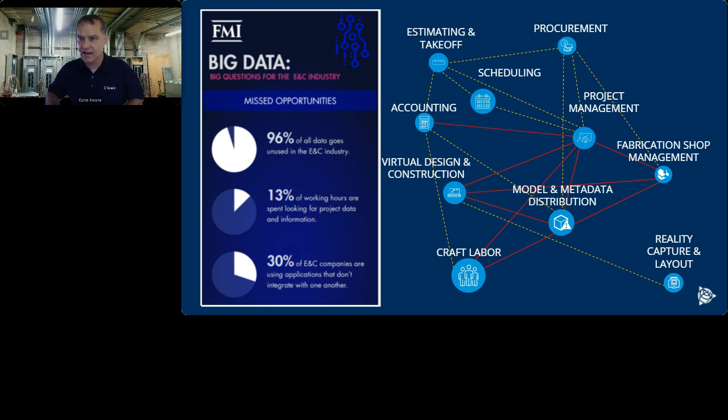So that's kind of the role that guides us here at Trimble. The way we look at this wheel of different apps, we feel we're uniquely positioned to do this well because we already have the industry-leading fabrication and estimating solutions out there. We're widely known for Accubid Estimating, Change Order Pro, Viewpoint ERP and Accounting, Supplier Exchange for Procurement, and SysQue for Modeling and Fabrication, robotic total stations, 3D laser scanners, and the XR10 HoloLens. It really circles all the way around the wheel in terms of the point solutions that we provide.

But hopefully where we shine is the ability to connect those dots and use Trimble Connect as a hub to all of these different workflows.

So Connect is an app that does a lot of things. At its highest level, it's a model viewer, regardless of whatever app, CAD or Revit, that the model was authored in—you can view it in Trimble Connect. Aside from that, it's a great file distribution platform, a little bit like Dropbox, except of course the model viewing capabilities make it a lot better.

Besides that, it becomes an issue tracker that your team can communicate with to get their jobs done. To pick a simple example, questions you might ask yourself, like: are we approved for a change order to do that work on the 4th floor? If so, it's going to change the quantities of material I need delivered on Monday. What's the date of the switchgear delivery that's holding us up? If we don't have it by a certain date, the consequence is going to be this.

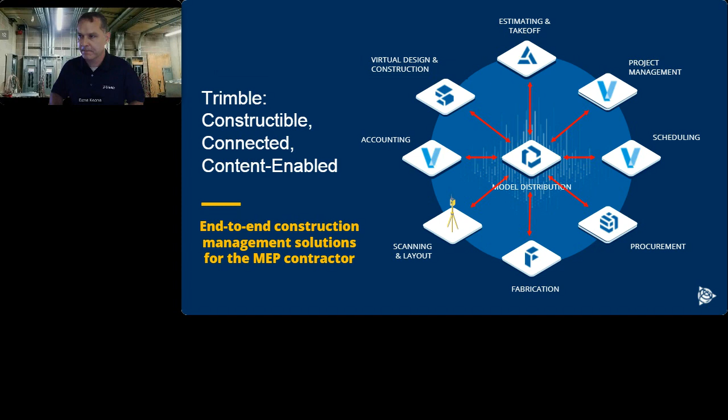These are things you can use Trimble Connect to interact with between the foreman at your shop and field, and the manager and the procurement folks—anybody on the team involved at all. You can answer those questions in a data-logged format and distribute that information around, logging what the answer is, when it was resolved, and even the construction progress, which we'll get into a little bit later. So keep that in mind as we go through this.

We'll talk about that a little bit more later, but another study that deserves a mention here is this one by McKinsey & Company. It's required reading for us here at Trimble, and it guides a lot of our development because it outlines a lot of things undergoing change in the industry right now. It's a very complex study, but I'd summarize it like this.

Construction is finally getting to the point where technology is able to affect the bottom line and the workflows in it. We know it's changed our lives tremendously when you look at technologies you use every day, like Netflix, cell phone apps, Amazon, and things like that. But has it really changed the profitability of electrical contractors? Not so much, but it's definitely having that effect now and going forward over the next 10 years. That's what the study outlines.

It talks about 9 shifts in the industry that are going to affect the way construction is performed. We're going to check out 2 of them specifically today: productization of your work scope—reducing it into small, bite-sized, assembly-line type manufacturing processes—and digitization of your processes, where you can track things all the way through from beginning to end and report on them.

Another big thing this study outlines is that the transformation will involve a reallocation of who gets paid to do what in the industry. So $1 trillion is going to be reallocated to the contractors who actually do the work, a lot of it at the expense of CMs and engineers. This reallocation of money is going to go to certain ones who can add more value to the project, specifically by doing a lot of this productization, by being able to prefab offsite, control their inventory, and operate fast enough to keep up with this.

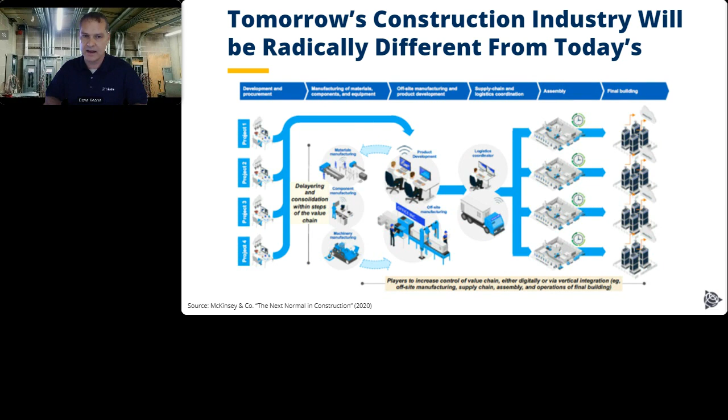What the new normal is going to look like is to install durable processes that will make every project feed into this service, where your processes will dominate and repeatability will happen, and every process from estimating to procurement, fabrication, and all logistics of prefab delivery and installation gets to be repeatable, so jobs get executed a lot more economically with a lot higher quality. That is what's at stake for those who want to reach for that $265 billion in revenue. It'll look a lot like this.

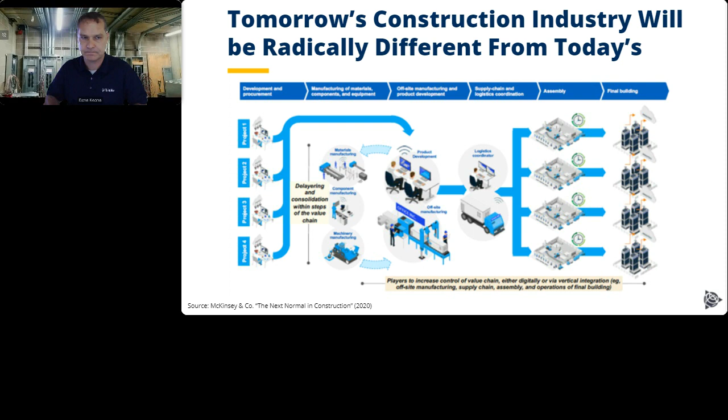So at this point, let's take a poll and ask, what are the top priorities for sustaining and growing your business among these choices? What do you view as the top things that you must do as an electrical contractor to stabilize yourself and position yourself for the future? We'll take a couple minutes here and give you a chance to answer this poll question, and then we'll take a look at the results.

All right, let's take a look. So 75% increased prefabrication and 25% model-based estimating. Okay, good, so that's very good. That'll be very closely in line to what we can talk about today.

So this is the agenda for today. We'll talk about 5 things here under the umbrella of productizing and digitizing. First, we'll begin with very specific and granular ways that you can productize construction, which is essentially prefabrication and the logistics behind it, and then digitizing your workflow, being able to translate information from a model to an estimate, from a model to procurement, and from field progress to management. So let us begin.

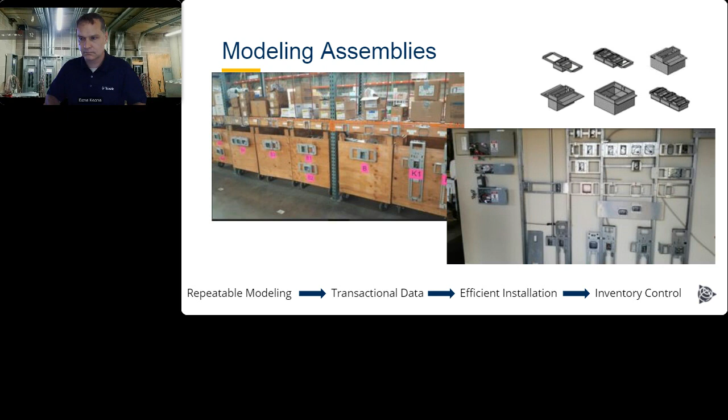All right, can you walk us through that, Judy, what that looks like here in the live view?

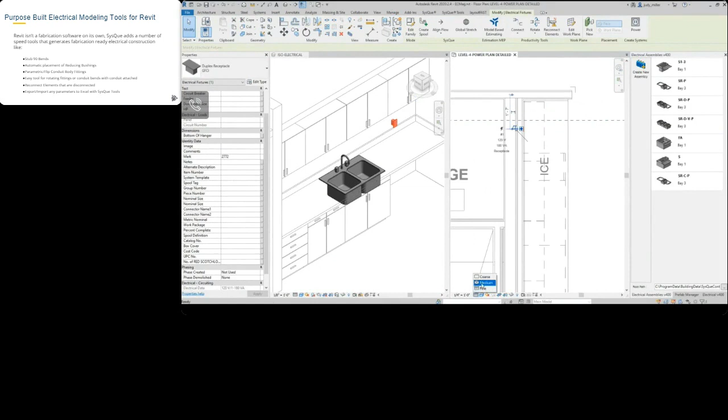Sure. Judy, we can't hear you. I'm trying to see the video, and I'm not seeing the video. Okay, there we go. All right, sorry.

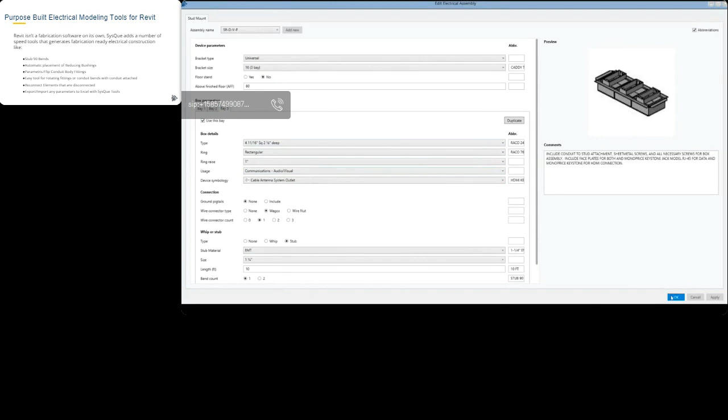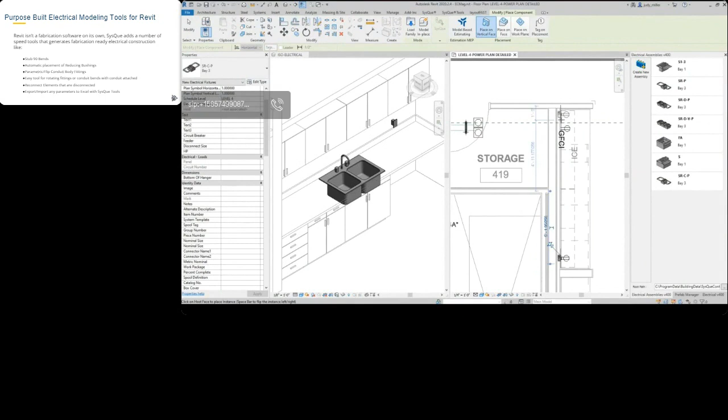So what we showed you at the beginning there was what Revit has out of the box, which is very basic, right? And now we're putting together electrical assemblies within SysQue. So you're picking not only the stud plate or the plate that you're using, the box that you're using, what devices are going to go into each box, the symbology for those as well, in a 2D plan versus a 3D plan. And the elevation also, so when you place these assemblies, you're going to put those directly into the model at the correct elevation as well.

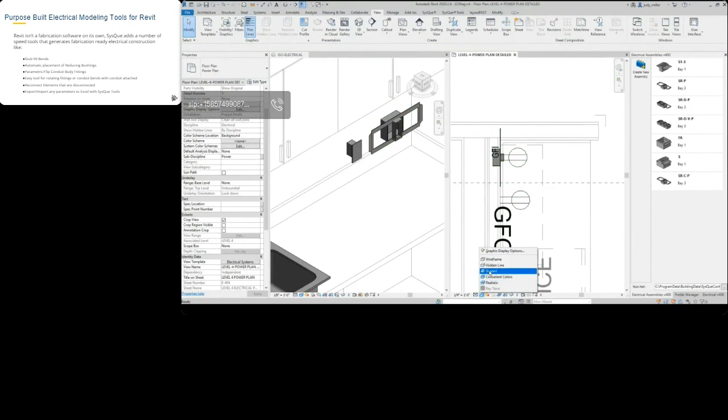So again, you see it there in the 3D view. It looks a lot different than what's in the Revit view, right? Your box is not sitting on the face of the wall, it's in the wall like it should be. You can move the symbology around as necessary as well.

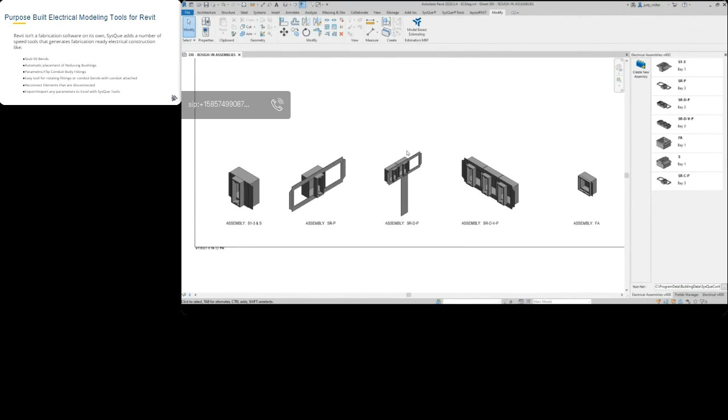When you change from a coarse view to a medium view, you still see that same graphics, where in Revit, when you change to a medium view, you get the 2D symbology in the 2D plan, but your conduit goes to a single line.

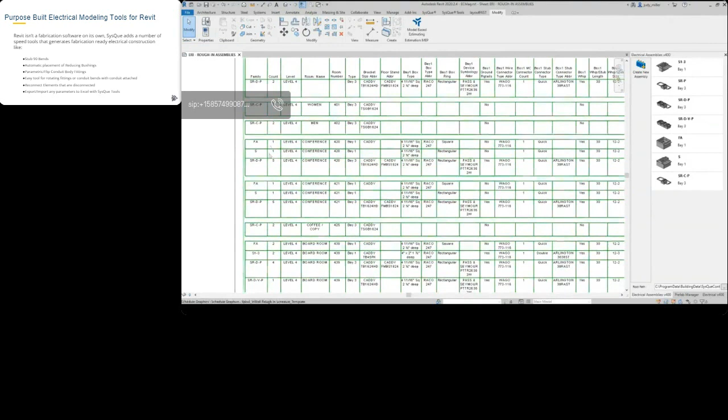So again, this is just an image of what your assemblies will look like as far as details go. And then you have a schedule. You have a Revit schedule that you can sort by room number, you can sort by device type, and it's going to give your prefab department all the information of the pieces and parts that they need to put together. Bundle it by room number or however you do it, and then drop it off at the site.

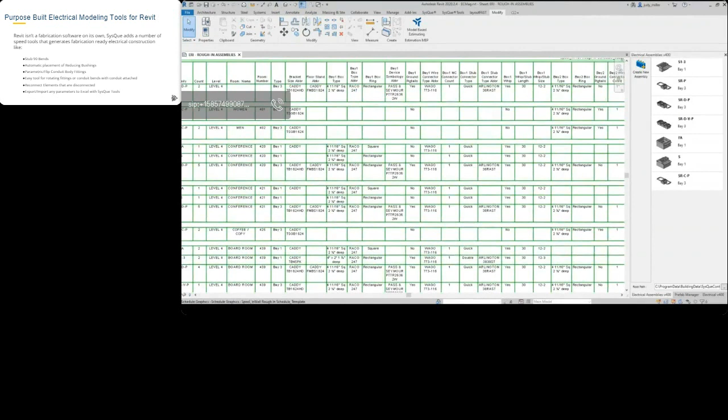So it makes a clean drawing for you. Yeah, that sure is a clean drawing, and certainly everything you need to fabricate every assembly on that floor.

So that's awesome. One of the other biggest gates to productization of Revit models is that the baseline tools to draw electrical work in Revit just isn't fast enough. It creates just enough friction in the process to give people pause on whether or not they have the bandwidth to model jobs. And when they don't, they lose some of that opportunity to productize and digitize. Can you walk us through some of the technical tools that add more speed and accuracy to the process of modeling?

Sure. So we have different productivity tools, right? You can do import and export parameters as you wish. You can create your views to be... sorry, I keep losing this. Okay.

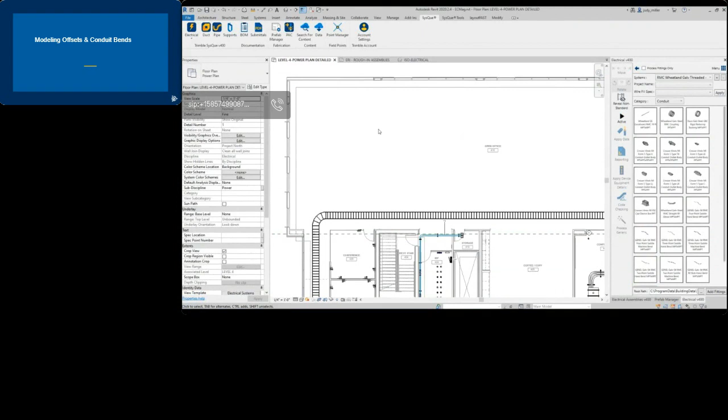So in this particular video, what we're showing here is modeling with rigid conduit. We have a stub 90 that you can place along with your conduit.

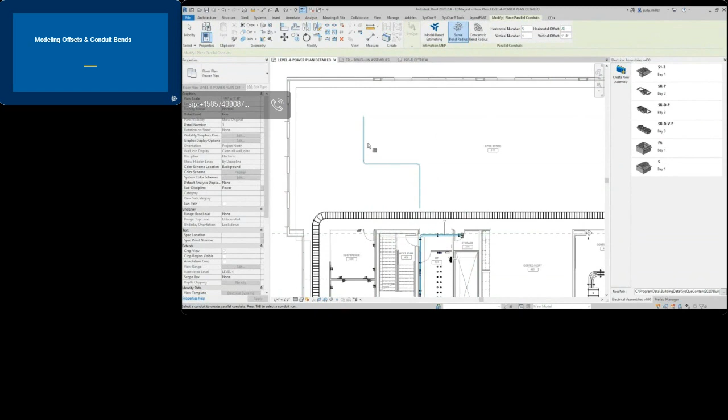Dave, is the video playing? Yep. Because I'm not seeing it, sorry.

It puts a stub 90 in automatically, and the couplings, you can place a T with the reducing bushing if you're changing conduit size. You can rotate that fitting as well, and then create spool drawings out of it, so your prefab, all the information is going to be there for you to help your shop out with whatever it is that they need.

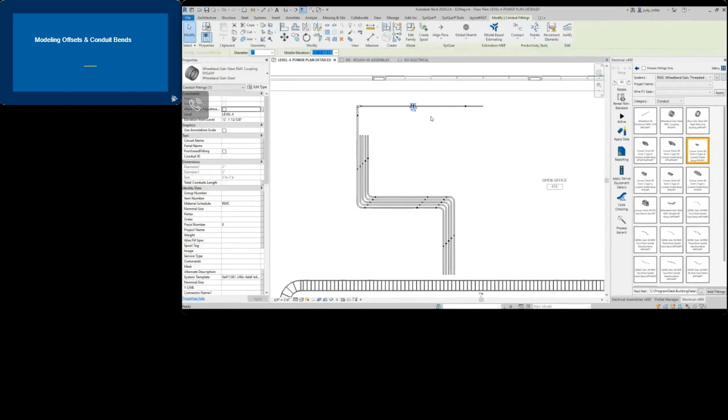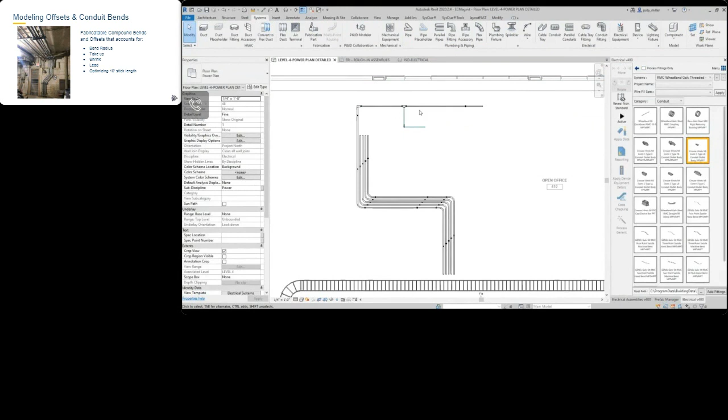So we're rolling the video here, and what Judy's showing is we had modeled the conduit with the stub 90s, and then what we're showing now is when we tee off some of that conduit, Revit would normally place that generic J-box there, but what we do with our application SysQue is we put in the LB or the T there with automatic reducers in it, as you can see right there in the video. Judy's going to pick these for us.

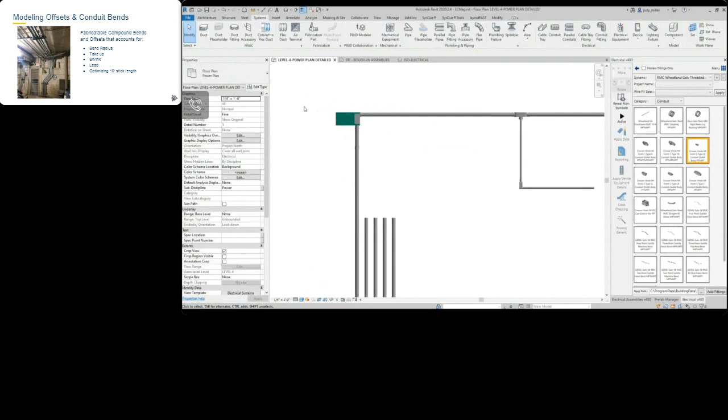So without any extra thought, we're modeling real-world stuff with our LBs. We're adding clearances to those if we need to keep that side clear. We also have flip grips on those. She's got an LB there. We can flip an LB. So for 3D coordination and real-world parts procurement, we have it right there.

And then there's that reducing bushing that we automatically placed to go from looks like 2-inch to 1-inch conduit, or similar. And then also some other part of the speed tools is what we're seeing here is we can easily rotate those objects.

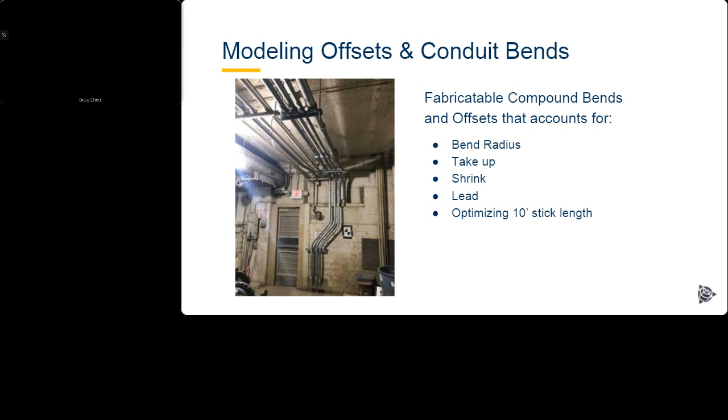Awesome, so thanks for the overview, guys. So then aside from that, when it comes to modeling conduit bends and things that need to be fabricated in the shop, we get the luxury of talking to thousands of electrical subs in any given year. And in my experience anyway, conduit fabrication is the single biggest opportunity most identify to expand their prefab or aspire to for beginners. Again, though, the technical limits and modeling tools are sometimes the obstacles to productizing this conduit fab.

What are some of the families that we've built for Revit and workflows that we've made to best optimize the chance to prefab more and more conduit, guys? Okay, so what we've done is include 4-point saddles, 3-point saddles, stub 90, and the offset family to make it easier for modeling, like I showed in the first video there about the stub 90, to make it easier for prefabrication.

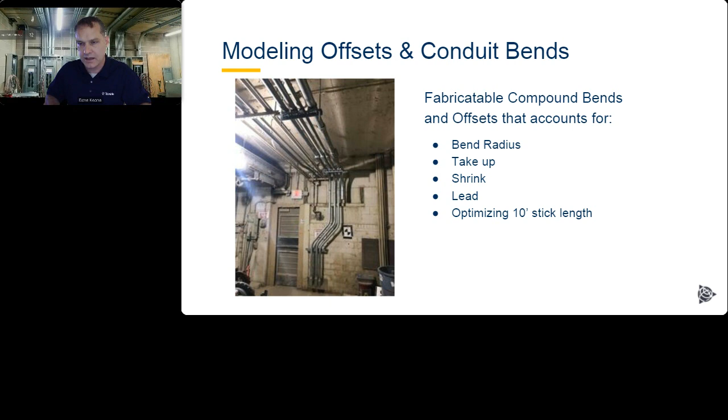Okay, can you walk us through some of the different offset families and what goes into building them?

So you're going to start with the 2-point offset. We have a different family for each of those saddles and offsets, hand bend and machine bend, because your marks are going to be in a different location. Your hand bend is going to be limited in size as well, you're certainly not going to bend a 2-inch pipe with a hand bend. So what these give you, you place them in your model, adjust your offset, adjust your height that you want to go around. And on the right-hand side of that drawing, it gives you your mark A, your mark B, and what angles you're using to bend.

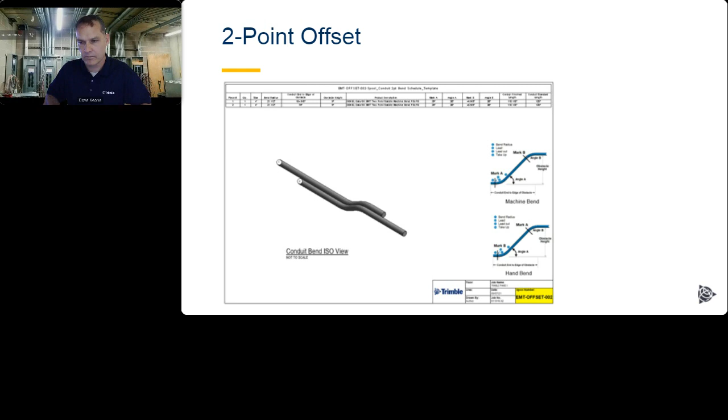The next example is the 3-point saddle. Same functionality, right? You've got your offset, your end to the center of your obstacle in this case, your width and your height, for the machine bend and hand bend. On the right-hand side, you're adding a dimension to that, so you're adding A, B, C, and then your angles. All of these, by the way, give you the finished length at the end.

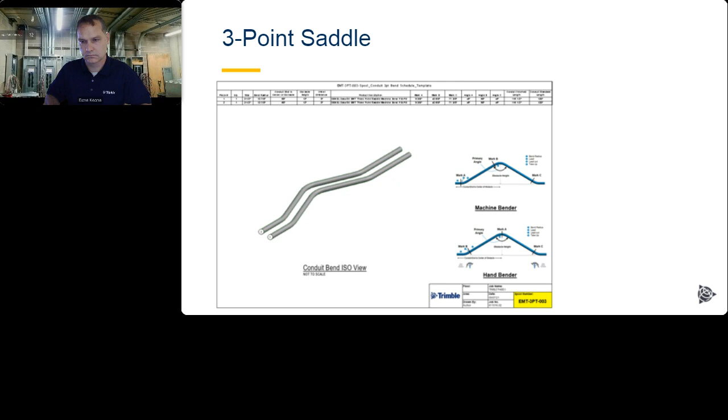All of these have the finished length of your conduit, and they're all based on a 10-foot stick of conduit. So if you try to go beyond that 10 feet, it's going to give you a message because they're all designed to be maintained in that 10-foot length. Now if you're buying 20-foot, you can certainly change your values to 20 as well.

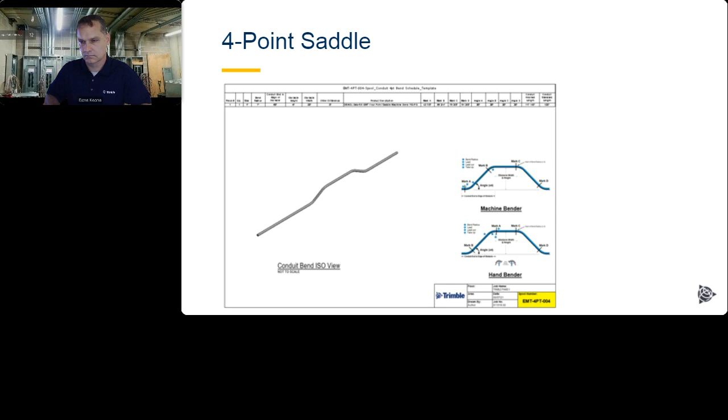So the 4-point, again, you're just adding another dimension to it, so now you're at mark A, B, C, and D. We factored in the shrink, the take up, the bend angle, the lead. All of that's being done behind the scenes so that your shop doesn't have to do the math, right? It's all about getting it out quick and being accurate.

So stub 90, very minimal information, right? You can define what you want your stub length to be. When you add it to the palette, it's going to have what your minimums are. But if your company wants to do a larger minimum, say a 24-inch stub instead of what the very minimum is, you can set that up automatically, so every time it places it, it's a 24-inch stub, for example. The schedule is going to give you stub length from the back of the bend to the end, and tail length from the back to the end. You can flip this as well, so if you needed it to go in a different orientation, you can flip it like you did with the LBs, and it's going to give you the mark value as well.

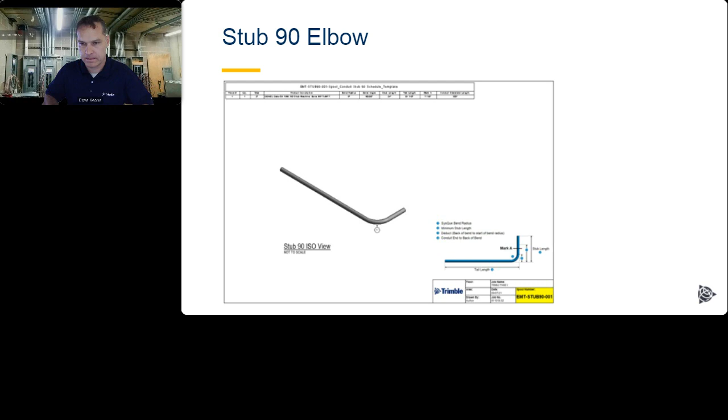All right, so now we have a pretty good picture of how a model is made to be fabrication ready, and it's not just a pretty picture. When it comes time to package it up and productize the work for the shop and field users, walk us through what some of these outputs look like, Judy.

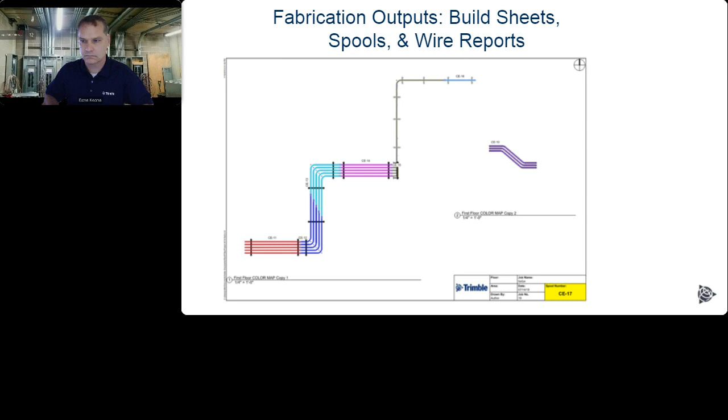In addition to that, we can do prefabrication drawings for hangers, because hangers are really low-hanging fruit, right? You can put these out rather quickly. With ours, the rod lengths go to the slab or the steel above, so you know what the accurate rod lengths are. Whether it's a multi-tier or a single tier or back-to-back hanger, trapeze, you can tell it how many to build. You can renumber those so that your parameters are equal for the same hanger, instead of giving them a different number for each one, and they have a quantity to build.

They know what the strut length is, what the rod diameter is, rod length 1, rod length 2. Say you're on a sloped slab that you're connecting to, they would be different. How many nuts, how many washers, and in the multi-tier one, if you have multiple tiers turned on, it's going to actually give you a total strut length to build that entire hanger based on the number of racks you have turned on.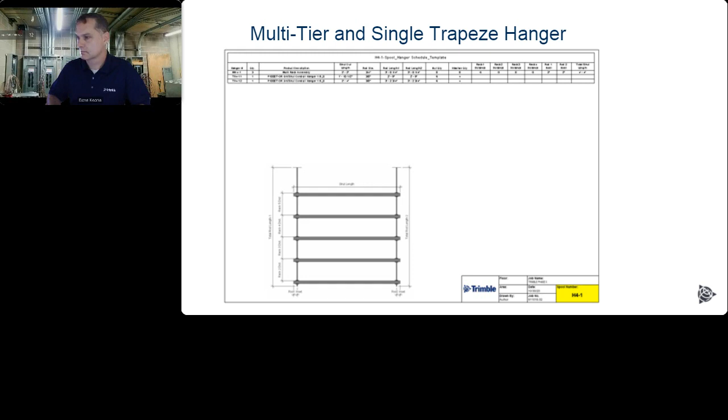Another example is creating a fabrication drawing for conduit, and it's really based on what you select for that particular drawing. Once you select it and apply the template we provide, you're going to get views. They're going to be tagged in the schedule. In this case, it's rigid, so it's going to be threaded, not bent.

So you've got your cut lengths for your conduit. We know what the engagement is on all of those fittings, and that's been incorporated in those fittings. So your cut lengths are going to be accurate, and your parts list is complete.

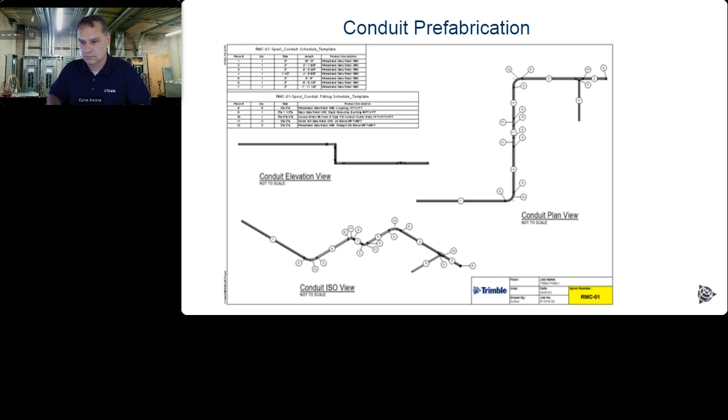So how about wire reporting? Yeah, so wire reporting, we have the functionality of adding wire to your conduit, and you can do it in two different manners. One is just a wire fill kind of concept for feeders, for example. The second way is to assign panels and circuits to your conduit.

Both of those options, if you apply wire to your conduit, we're going to be checking to make sure you don't exceed a 40% fill in your conduit, because we know what wires you're putting in there and the sizes of those.

Also, you're going to be able to get this report, and in our families, we have an added wire length parameter in there. So not only are you going to get your conduit length, but you're going to get a wire length based on those added wire length parameters that you need.

It's going to tell you what color conductors, grounds, and neutrals you need. And it's also checking to make sure you don't exceed your maximum bend angle. So if your job requirement is 360, it's going to tell you if you exceed that. If your job requirement is 270, it's going to tell you if you exceed that as well.

It does that during modeling, but we also have a code check option where you can just select your runs and check them after you've done changes to it, for example.

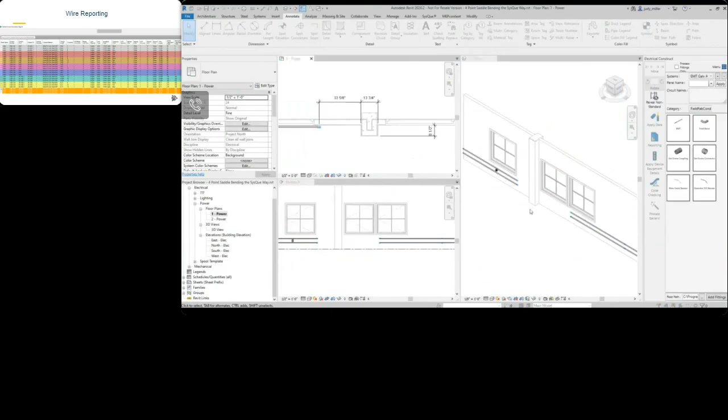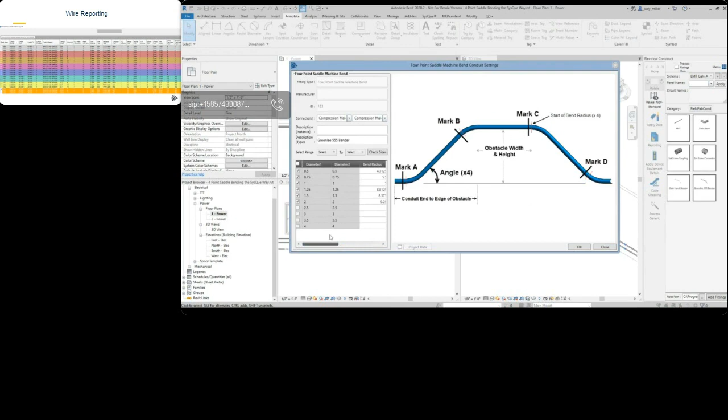Okay, so here I took the 4-point saddle. We had an area in the building that we needed to go around a column. We were running conduit down the side of the wall there. So we took advantage of the bend radius, the leads, and all the values that we put into these saddles.

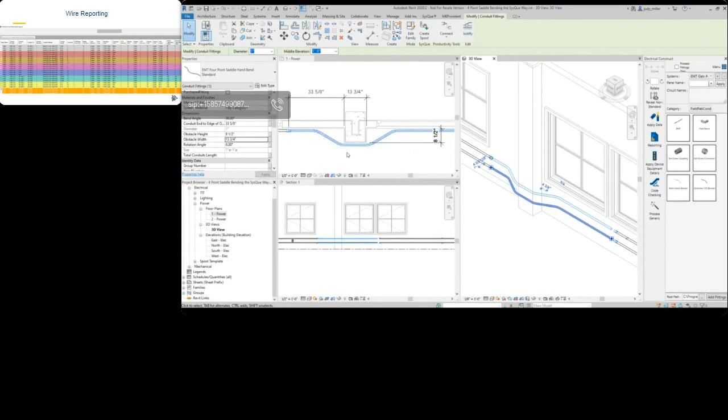So if you just click on the conduit that you have placed, say you've got to cut out a 10-foot section of conduit that you place your saddles in, adjust your end to the edge of the obstacle like we talked about, adjust your width and your height of your obstacle. Notice that the conduits don't connect anymore because it's shorter, obviously, than 120 inches or 10 feet, right?

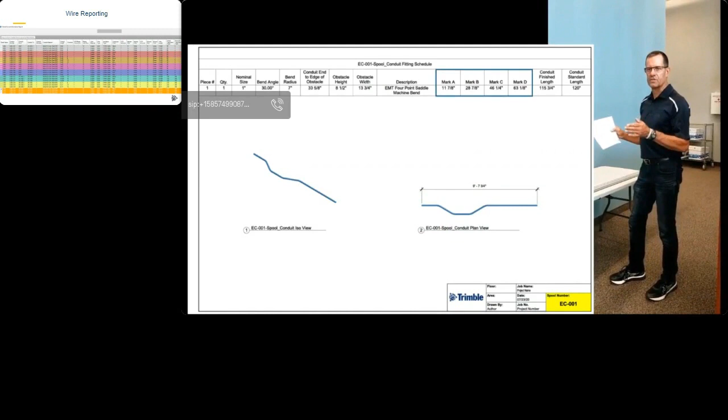So we give you the mark values, A, B, C, and D, like we talked about. Since we've done this video, we've also added the angles to the schedule. So what Ron's doing here is we've simulated, and you can see this with a HoloLens too, where those saddles are going to fit on the wall.

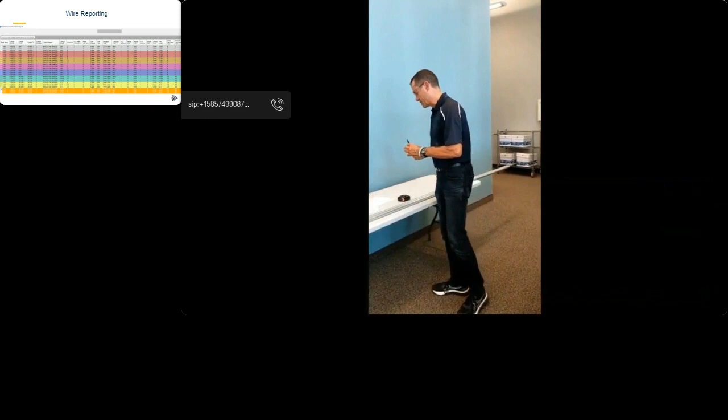Okay, so Ron took the drawing, laid conduit on the table, which is how it's all designed to be, and just started putting those marks on the conduit with a Sharpie and a tape measure so that he can start bending that 4-point saddle with, I think, the Greenlee triple nickel bender. He's going to just put those marks in there and then start bending.

So Ron's pretty fast at this. He's been doing it for years. You'll see that he just zips right through this, obviously. We made it go a little bit faster for this presentation. I'm just making a joke that he's fast.

He has been bending conduit for years. He lines the marks up with the shoe, bends the conduit, and then takes it back over to the building and places it right in place. He did this also for a hand bend, so we gave him the values for the hand bend for the same conduit, and you see he's got both of those laying on the floor.

They both align with each other. The blue line is the simulation. He's going to place that into the coupling, and it goes nicely around the column. So what you're placing in your model with these saddles is what's actually going to be built and placed in the building.

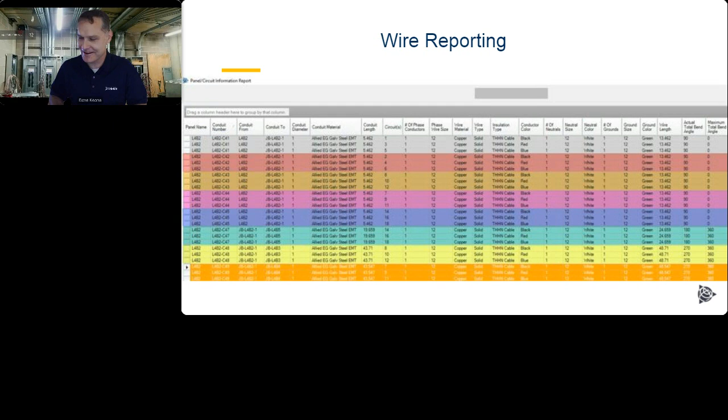Dave, I think you're muted. Dave, you're muted. Sorry folks, a little technical difficulty. Let's give Dave a minute to come back. Dave, can you hear us? Oh, can you hear me now? There you are, there you are. All right, pardon, I don't know what happened there.

All right, so let's roll a poll question at this time. So when you go to procure materials, what is the source of the majority of your procurement? Is it project estimates, lists from your field or management team, or the model itself? Let's take a minute and ask that question and see what the results come back.

Okay, so looks like a quarter of it from the estimate, 62 or 3% from the lists that are created by the field team, and then model-based procurement at 12.5%. So interesting, we'll look at that in the next couple of workflows and see if there's any opportunity to look at that for you guys.

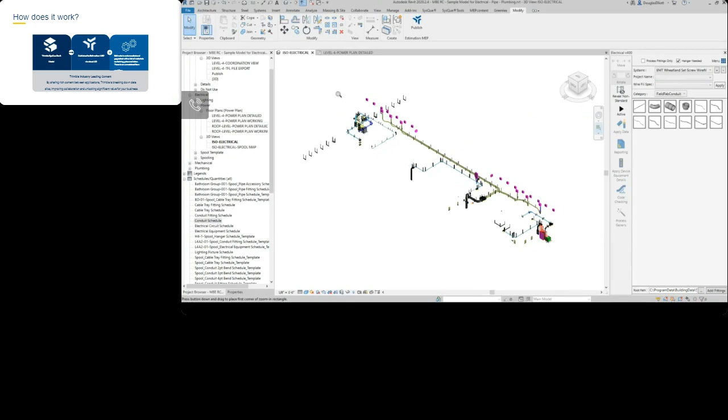So what you're seeing is a model of a typical fourth floor commercial office building. We're looking at the power and teledata plan. The green is the teledata, the blue is the power, and we have some feeder conduit in there as well.

What we want to do is buy out our fourth floor conduit. So in this example, we're windowing in all the conduit for the fourth floor. I'm going to filter it down just to our conduit and fittings, and then send that to model-based estimating.

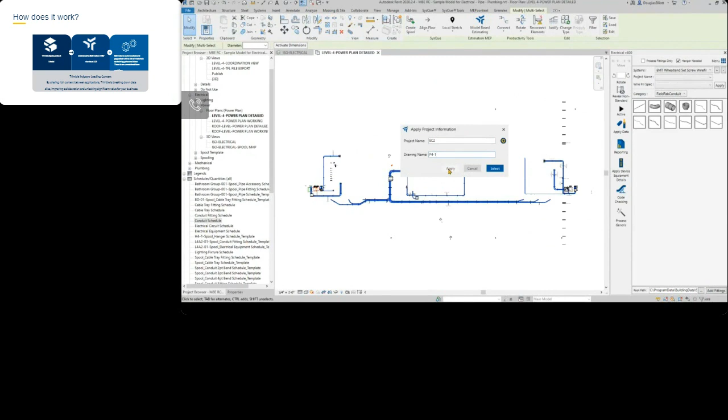By clicking on the model-based estimating icon, it allows us to define a few work breakdown structures here - project name, drawing name, and soon we'll have a few more work breakdowns we can define. You'll notice when I hit apply here, that schedule is going to get created. It's called EC2.

And there, that schedule is created in our project browser. We're going to go ahead and open up that schedule. You can see it here - column A shows the project name, column B shows the drawing name, and column C is going to show the system that we've assigned from SysQue.

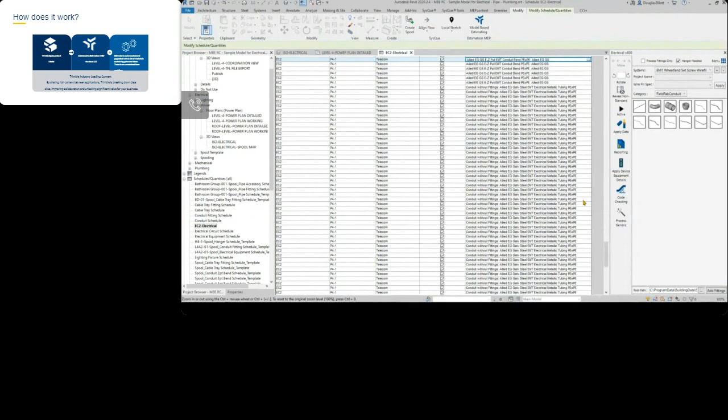The column with the checkboxes in it, if it's checked, means that it's found a link to our building data - content that's been linked to SysQue. The ones that aren't checked are more generic content that we've modeled.

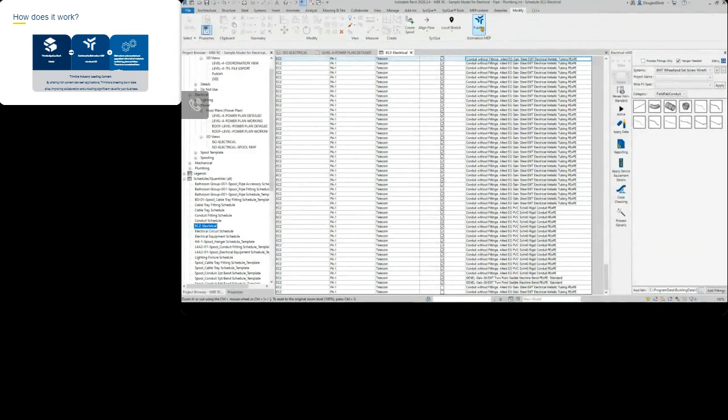So just by a simple click here, we're going to take this schedule, click on Publish, and we just sent that to the cloud, Estimation MEP. I'm here at Estimation MEP, and I'm going to rename my estimate to something that's a little more human-friendly than machine-friendly with the timestamp on it.

But that estimate was created for us automatically - there's nothing I had to do. Just by sending that schedule from SysQue, we get the estimate here in Estimation MEP, our new web-based estimating platform, and that's what we're looking at here.

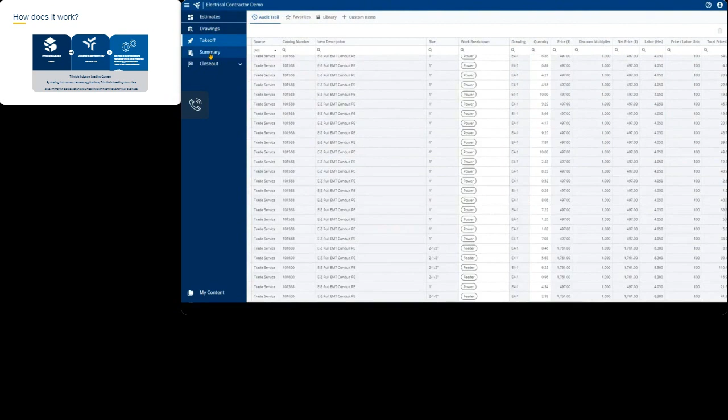Over on the left, we've got some navigation items, and then we're seeing that audit trail that we had from our SysQue model. Again, that first column where it says trade service - those are the ones that have the checkbox checked in our schedule, meaning it found a link to our building data. And then you saw the breakdowns there for power and such for systems.

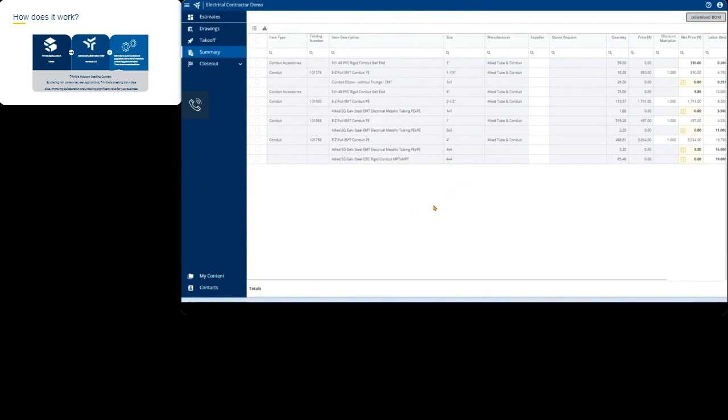From our summary, we took that whole fourth floor - there's literally hundreds of lines in our audit trail - and boiled it down here to our summary of just what that is. Then we're going to export that out to a BOM, or bill of material.

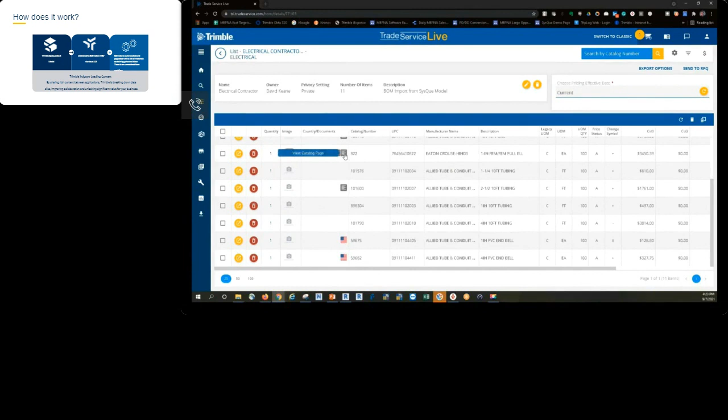It could be stuff like labor values, submittal cut sheets, MSDS if applicable, and the catalog page. You can drill into it and say, this is exactly what I want. If I need to know whether to substitute it or not, it'll tell you country of origin and things like that. So when I'm ready to send it to procurement, I can give it a job name and number, and any tagging information I'll need to use to verify it.

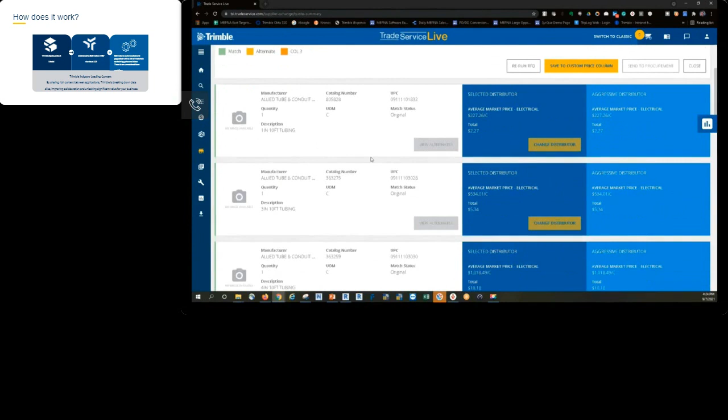And then I can select distributors to send it to for quotes. I'm personally not connected to any supply houses, but we have a couple sample vendors set up here that I can show you. When you do it, you'll be running it against your local suppliers in whatever region or city you're at. Then it goes through and tells you who, out of who's quoting it, is the most competitive, and whether everything is a dead match or an alternate, so you can consider maybe lower priced alternates, or decide that you can't.

It needs to be domestic or whatever, so you're not going to accept any alternates. You go through that matching process and verify it. You can either cherry pick the lowest cost and split the order, or pick one vendor based on price, delivery, and overall best value, and place the order from there. So that is the workflow from deriving the model to estimating it to turning around and procuring it.

What we just saw there, that's definitely getting people part of that $265 billion pie if they're following those workflows.

Yeah, it's certainly better than the status quo, which is generally very manual, right? Obviously, it's usually tapping and interrupting somebody from what they're doing. Hey, can you crank this through and estimate it for me? Hey, can you make a list out of this? We saw from the survey results that a lot of people are still getting field lists to turn around and manually price. There's a lot of steps saved by doing this workflow.

So that kind of is a good segue into other things that you can do with Trimble Connect. In terms of communication between detailers, managers, foremen, shop folks, how does Connect contribute to that? Most of all the intelligence that Judy showed us and that we looked at here is in Revit. How is it that it can be liberated out for everybody else to use as well? Can you walk us through that, Doug?

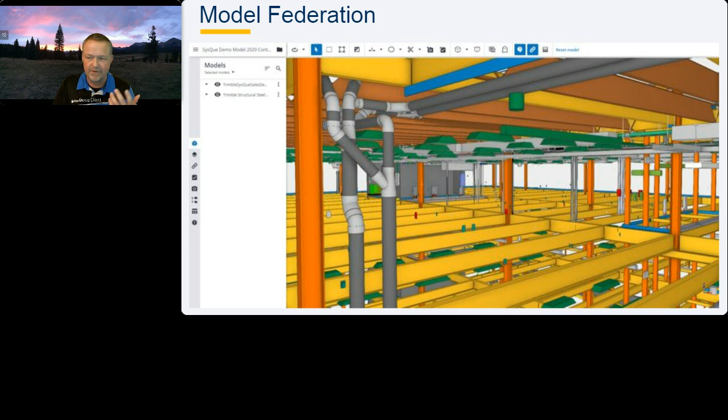And with just a few simple clicks, you can view those models all together. So here we're seeing our steel, our plumbing, our piping, our electrical, and our HVAC all in one view. And you don't have to be a CAD guru to get that to happen - just a few clicks and there's your model federated, ready to go. And then from that federated view, we can then find areas of the model, like here, where I wanted to ask someone in the field to go ahead and field verify our equipment clearances.

So by creating a to-do, when I save this as a view, it remembers everything that was set, all the models that we had federated. So when I give this to-do to say Dave or Judy, they don't have to worry about recreating, oh, he was viewing the structural model with this other model together. It just instantly takes you right to this point in the model, and then you can track the response to this to-do. So it's not about using emails or text or anything like that. It's all here, one source of truth, where we can track these to-dos, track progress on the project, and know what's going on because we can see it happening here.

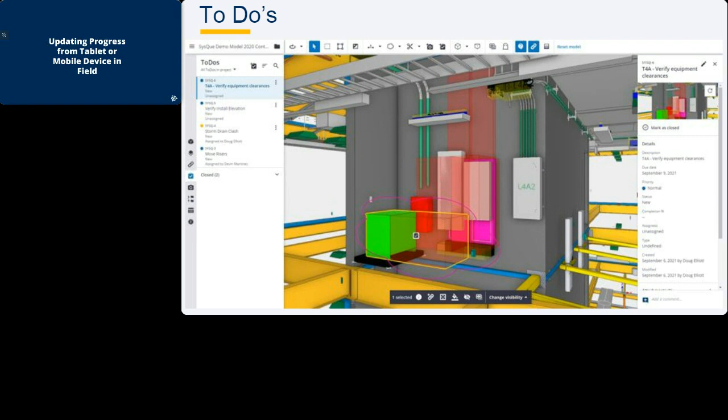So after to-dos, we're in our coordinated model, and we're now going to use Connect to manage the install in the field. So Dave, I'll kick it over to you. All right, yeah, I love that. Dimensioning, markup, tagging your colleagues for action items, that's all very efficient.

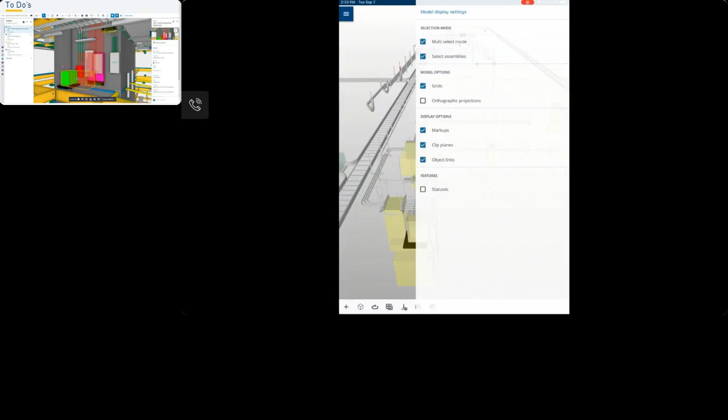So the next thing we're going to look at is, this is a tablet view here. I'm opening up a Revit model and updating progress. Purposes for this could be to compare your field progress against your cost report, or to check deadlines or establish a timeline of when things got done. So what you're seeing is, when you open it up, Trimble Connect has a status app that gives you a special view.

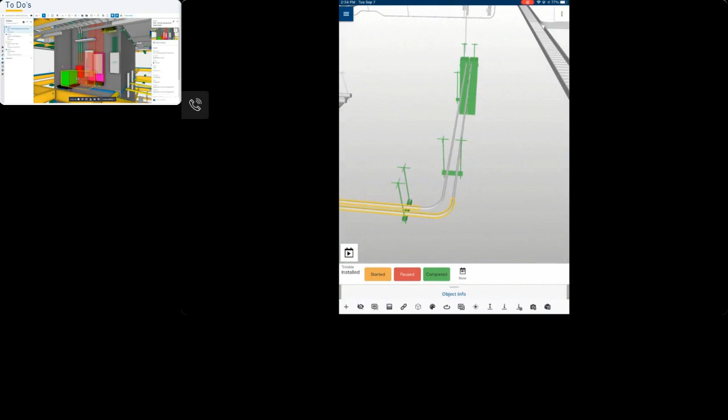Where it's going to use color codes to explain project status. So I'm a foreman trying to respond back with what got done today, so that a project manager doesn't have to drive out to the job site and see for himself. This could save a lot of time. So what I'm doing is just highlighting, touching every element to identify it. Yep, this all got done today, giving it a status, complete, and then everybody on the project team gets to see what got done and when.

And Doug, what does that look like from the desktop? Either I'm in the job trailer or I'm back at the office, and I open up the same Trimble Connect, and I see what my field foreman had just updated. So again, I could even be on my tablet on the job site as well and still see this stuff. So literally anywhere, I'll be able to get this progress.

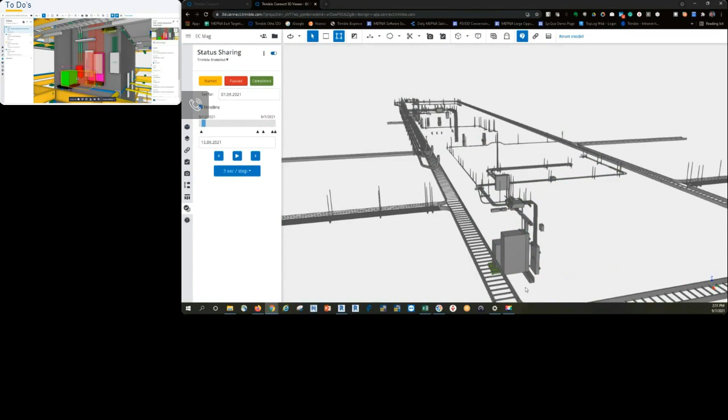And so from that timeline, my guy in the field created this stuff and made a timeline here for me. I could see what was completed where. We had our pad poured. We did some hangers. We got our transformer and panels installed. And then, as you saw what Dave did, as we go a little further in our timeline, we're showing that we took those conduits and got those installed as well.

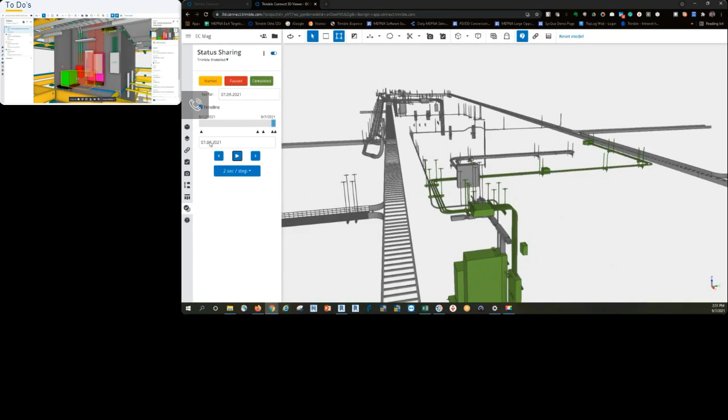And then we can set it up so it plays itself. Usually we think of these timelines for architectural and civil workflows, but we can easily apply these to MEP and see that play out from the pad being poured, hangers being hung, cure time on that pad, and so on. So really powerful stuff there.

Awesome. All right, so with that, I wanted to wrap up a little bit and talk about digitizing the workflows again.

In terms of digitizing the workflows, the number one advice I always think is to free yourself and your teammates from job issues and having communication funneled through texts, emails, phone calls, voicemails, and so on. All of those are static, dead end. They don't provide feedback loops or accountability. So I think one of the best things you can do to open up communication in your company is to seek out a system like this that's scalable enough to manage the nuances of fabrication and transactional data, yet simple enough for everybody to use. The best technology unused is not effective at all. So we really feel that Trimble Connect does this better than anything else on the market.

And then in terms of productization, it's a lot easier said than done to actually execute on it. The key elements are having data and workflows that are architected in the beginning to carry information and links to the workflow that other people are going to be doing with different software downstream, so that it can be harvested in a day or a week whenever you do need it. That's a little bit more tricky than it sounds. The currency, if you will, in all of these exchanges is the raw data itself.

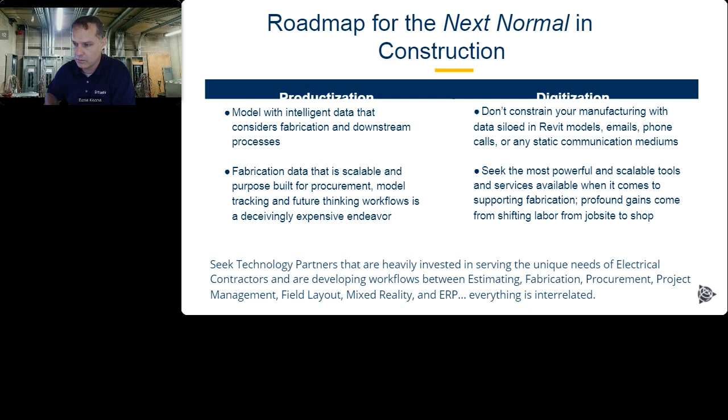Sometimes it's the Revit family, sometimes it's the trade service cost or the labor value that is carried in the background. So contractors should really do well to seek technology partners who understand this and how to make it all work together and build their solutions into it, because otherwise that burden could fall to yourself. And it's pretty tricky to stand up in the first place, and if you can, to maintain it on an ongoing basis.

So we kind of feel pretty well positioned that we are a good partner to do that here at Trimble. A couple of things about Trimble for those who don't already know it: we're an S&P 500 company traded on NASDAQ.

But one of the things I like the most is the fact that the research and development, we spend almost $500 million in research and development to keep developing and working on workflows that make some of these things happen. When you get into just the MEP segment, we're close to 1,000 people when you include contractors. I just can't think of another company that has that much electrical DNA, know-how, and investment in the industry. So I feel very proud to work on some of these developments, and I really think good things come out of looking at it holistically.

So one of the ways that we go to market is by bundles. All of our solutions now are bundled, where we're taking the approach that everything that would be good for a user, in this case a detailer, is bundled together in one subscription. This one is called VDC Pro Plus, and all the demonstration materials that you saw today were accomplished using SysQue and Trimble Connect in this instance.

SysQue is this add-in to Revit that provides all the utility and speed tools for Revit that are electrical specific, that Judy walked you through, and then also the families themselves that are all brand and part specific, that are cost loaded with NECA labor rates and pricing, making it just a very electrical centric way of modeling in Revit.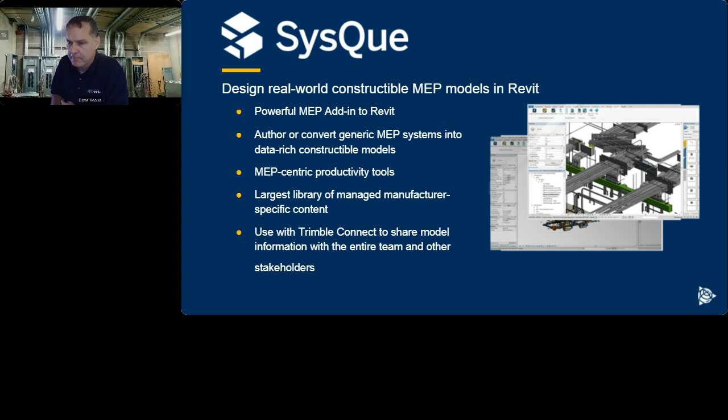This is really what we're after here, is just to simplify and make the process smooth enough so that more and more work gets funneled through the shop and less of it has to be exposed to job site conditions.

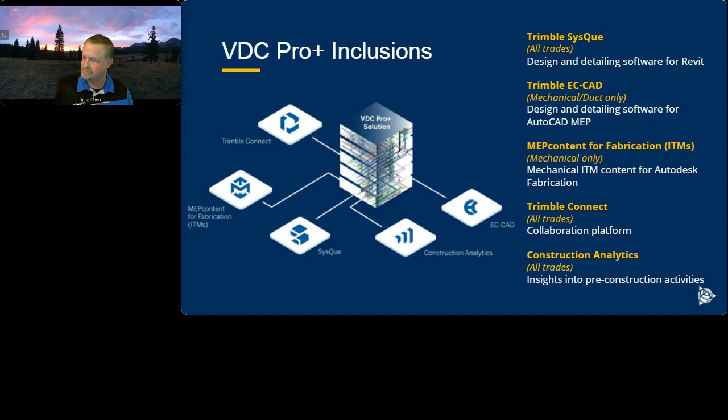All right, we have time for just one more question—does Trimble Connect come with the VDC Pro+ subscription? Yes, that's part of the strategy too, of providing a toolkit, similar to our estimating bundles which a lot of people may be familiar with. If it fits the profile of the user—a detailer—they'll get Trimble Connect Business Premium, they'll get SysQue, and they'll get the other tools in that bundle. Whenever we come out with better stuff that fits that profile, it goes in the bundle as well. That's the overarching strategy we're trying to serve the market with.